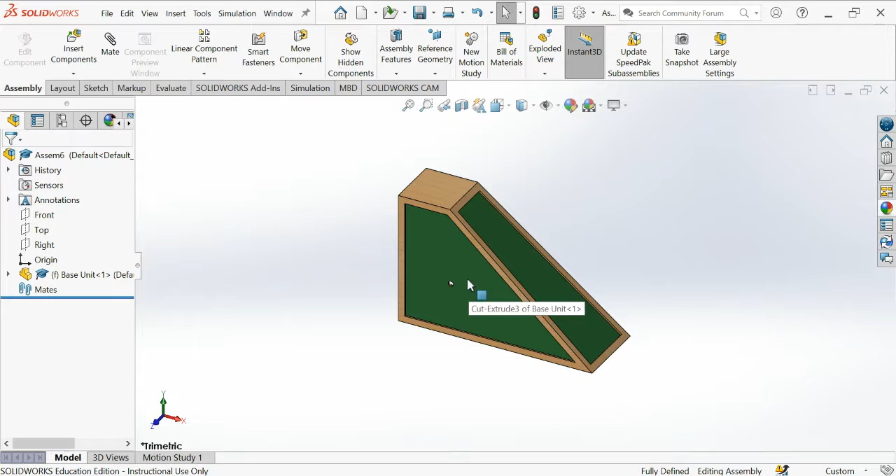So I'm just going to place that in place, but there's a couple of things that I want to do. Over in the modeling tree, I'm just going to right click on it and tell it to float for a second. I'm then going to select the bottom of it and tell that to mate onto the top work plane. So I'm happy that I've now mated that. Those two surfaces are now touching.

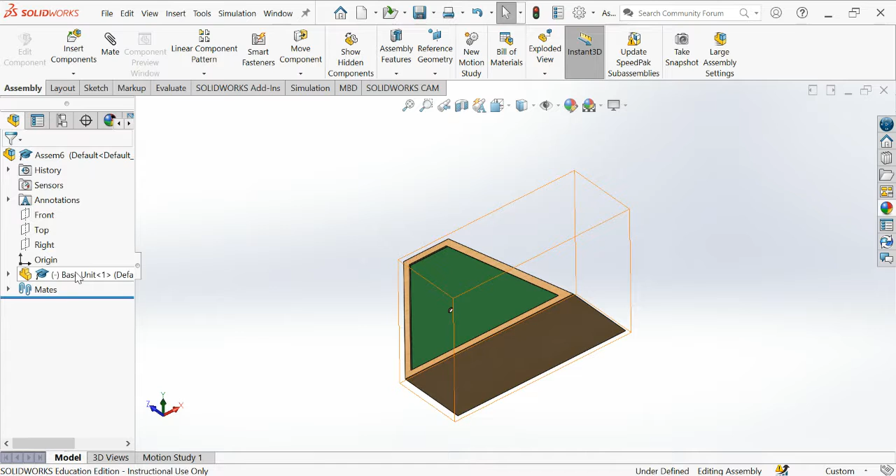And then I'm going to right click on my base unit. I'm going to tell it to fix. That means as I go about doing the rest of the assembly, this will never move about. So it's now stuck onto that top work plane.

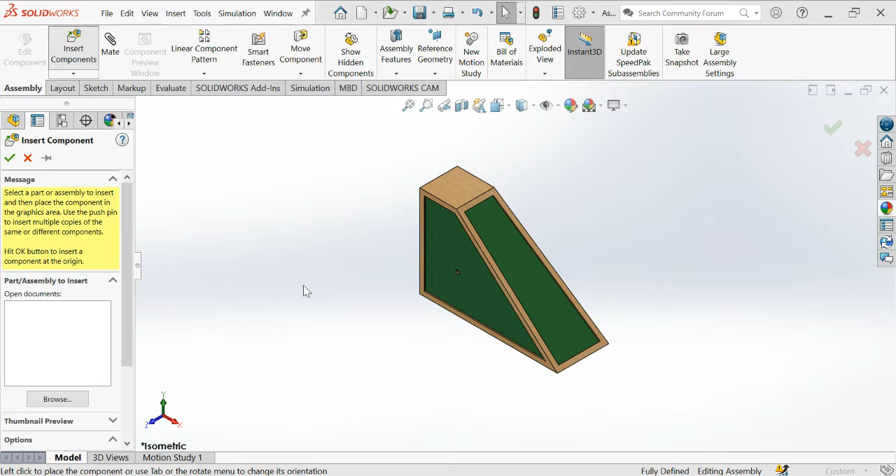Let's insert a couple more components. So we go Insert, we browse, and we're going to add in a wheel, like so. Again, I'll just give it a minute to catch up. There we go. So you can see our wheel here. If I just zoom in, you can see it's got some circular radial array holes in here.

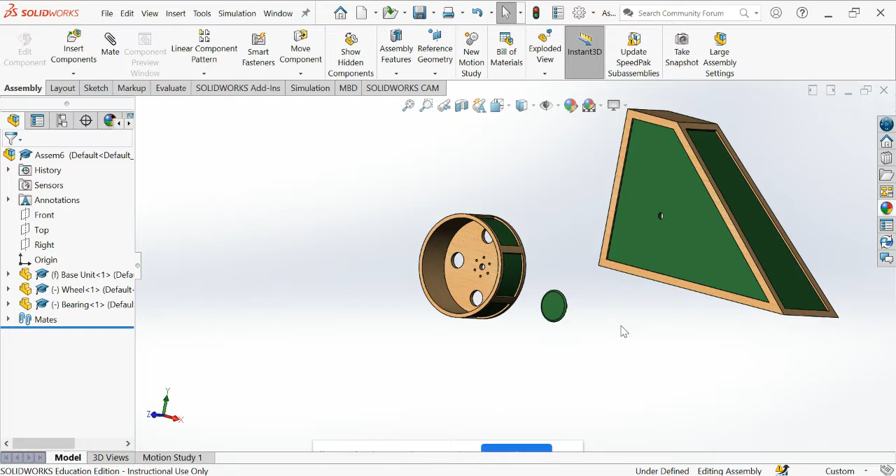And then we've got this main location hole, which needs to align up with this hole on the base unit. I'm just going to add in one more part. So we go Insert, we browse, and just give the computer a little minute to catch up. And we're looking for the bearing. So there we go. Press Open, and we'll pop the bearing in like so. And it's there. Right. Now, if I just rotate, you can kind of see that the bearing has some location pins, which will align with those location holes on the wheel.

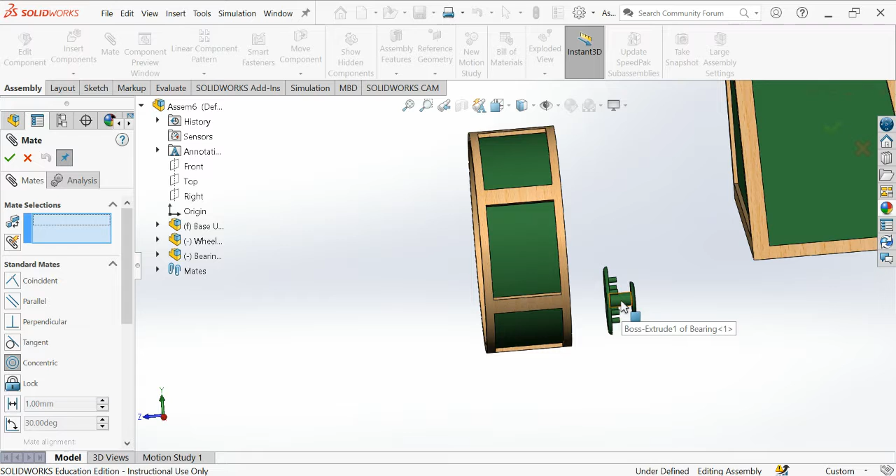Okay, let's go about using the mate tool. Be very careful you've not selected anything. I'm going to click mate. And what we're going to do is we're going to use concentric. What that does is it aligns the center axis of cylindrical features. So I'm going to select in this main pin here. I'm going to select that there. And I'm going to tell that to align with this main hole that's in here and confirm.

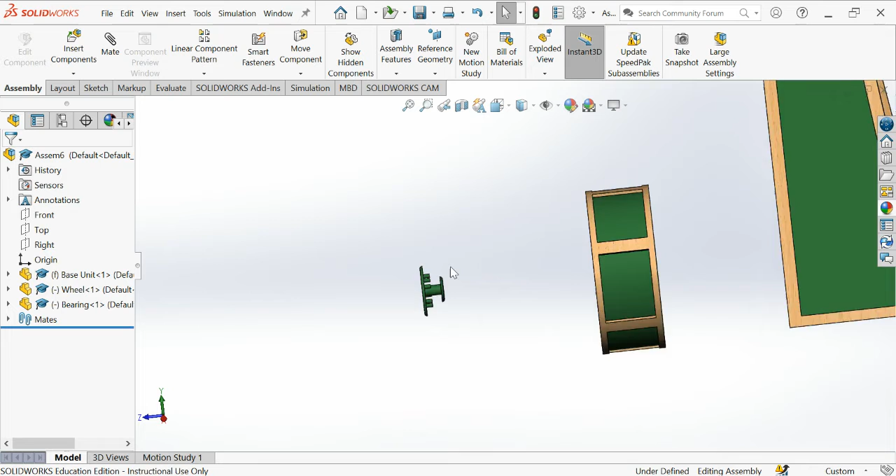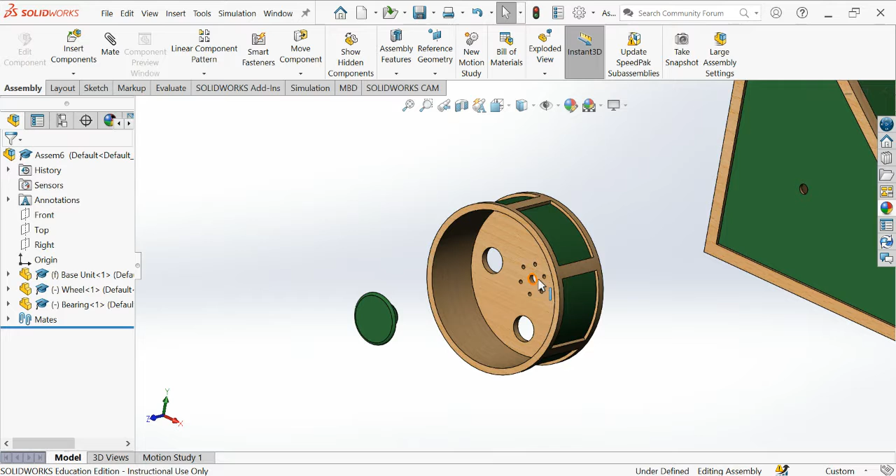At this point, I'm just going to show you that I can still move this bearing in and out like so. So if we zoom in, what I'm going to do is use the mate tool again. And this time I'm going to select this pin here and align the center axis using concentric, we'll go for this hole here and confirm. At which point, not a lot looks like has happened, but we've now aligned that hole here and the smaller hole above it. So we've got them matching up.

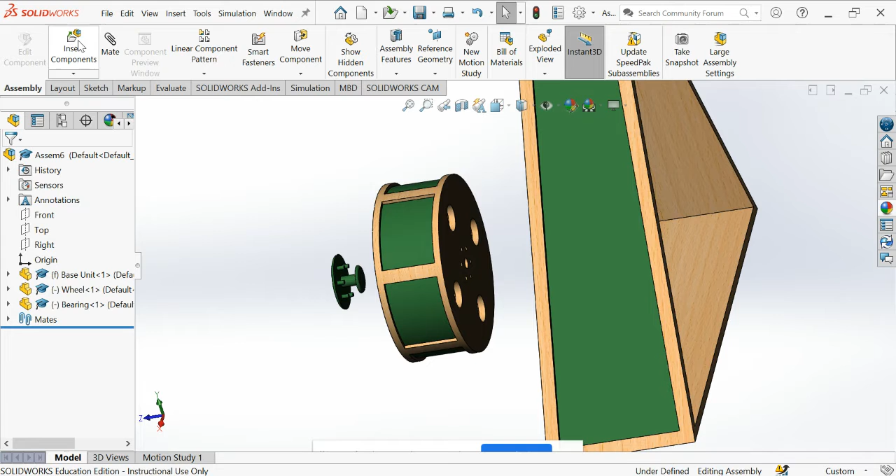I can now move this in and out. If we just spin round and zoom in a bit, you should be able to see that if I move this in and out, it matches up with those holes there. All right, I'm just going to pull this right out one last time. And I'm going to use the mate tool, and we're just going to mate this surface to touch this surface, which is what the mate is. Confirm. And I'm happy with that.

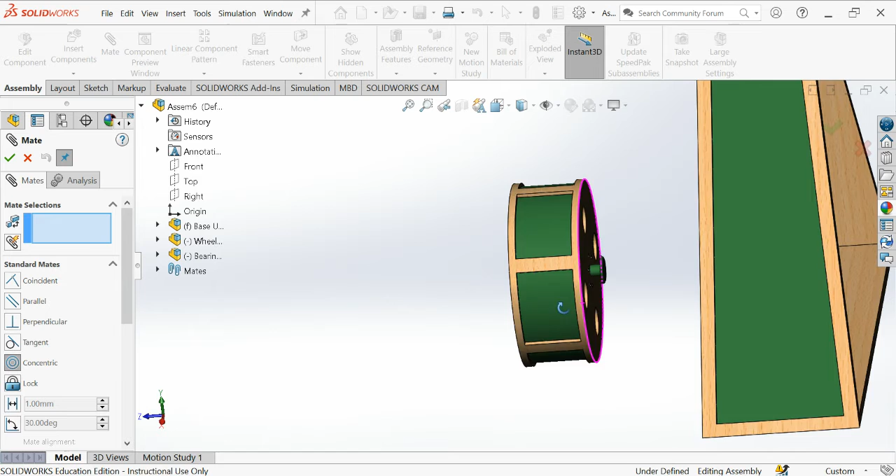These two parts are now assembled together. We just now need to get it onto the base unit. So the same process again. We go for concentric, which is aligning the center axis of this component part here and this hole here. So we're aligning the centers. Confirm. Again, I should still be able to pull this in and out. All right, yes, we've aligned the center, but I should still be able to pull this in and out.

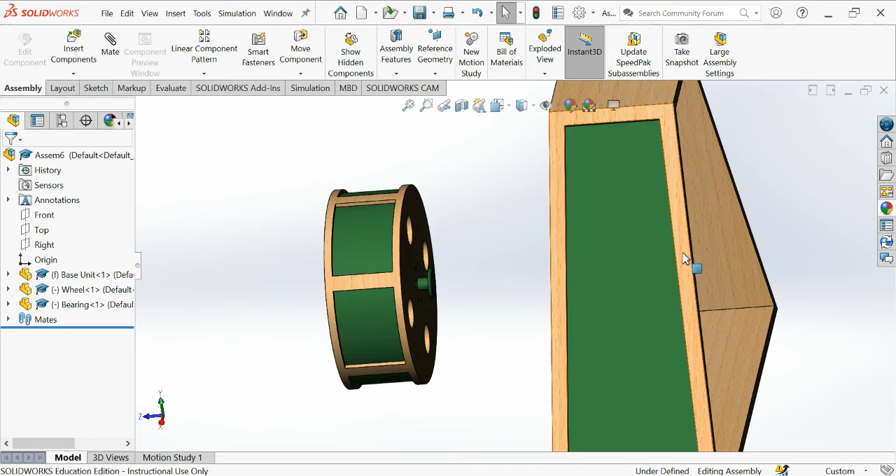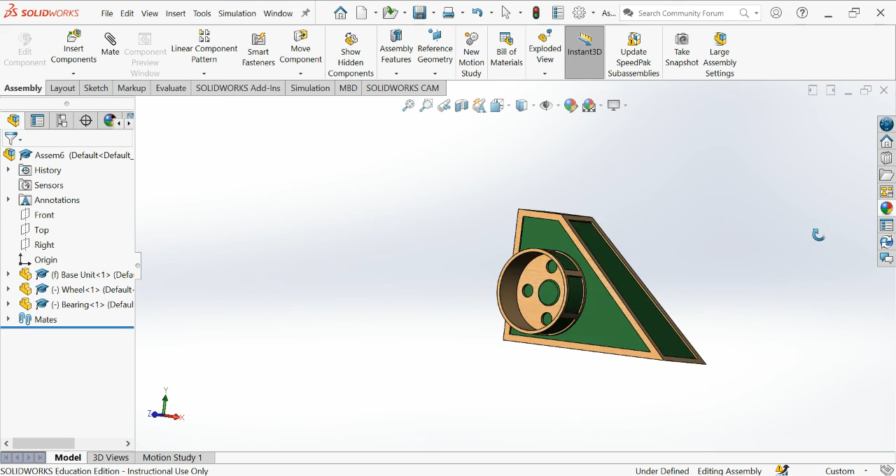Okay, last thing I'm going to do is I am going to mate this internal surface here, and then it gets a little bit tricky. I have to zoom in really close, and it's that surface there, the inside face of that bearing, and confirm. Now it's kind of disappeared off the page, so let's just zoom out and we can see what's happened. We've now got that nicely assembled on there, like so. It's sitting in there, and we've got a nice gap going on between the wheel and the main base unit.

These are the main parts of the mate tool, which we use for assembly, which include concentric, which is aligning the center axis, the overall mate tool. We can think about making things parallel, perpendicular, tangent, and we can add in little offsets as well.